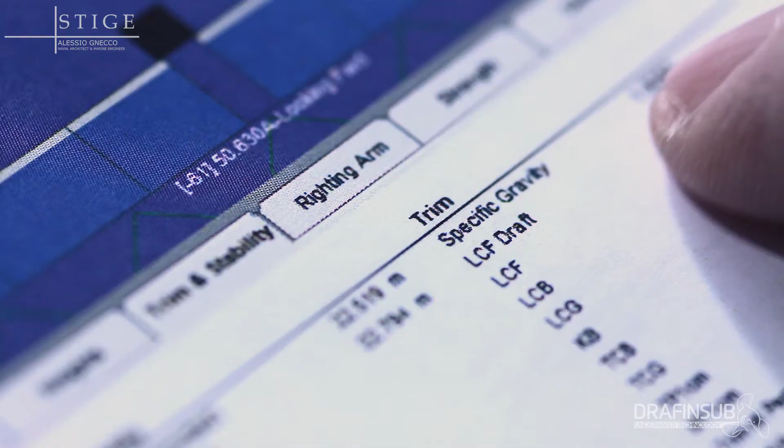I began my career in a relatively small shipyard in Italy. Most of our job was in repairs and conversions. And one of the most fascinating projects was the refitting of a cruise vessel which had sunk in the Baltic. It was salvaged and then towed to Italy to be refurbished. And it was a fascinating job. After a few months, we had the pride of redelivering the vessel in the Caribbean area. We delivered in Miami. And it was a nice moment in which we saw the new vessel sailing again for her new business.

When I was approached by the owners and managers of the disabled dock to prepare a feasibility study, I was aware of the challenges which were behind that project. The asset was an important one, and just the feasibility study showed that it was necessary to deal with different stakeholders. I knew, however, which were the tools to be used because they were not new to me. So I was conscious of the possibilities.

The incident has caused dramatic consequences to a number of persons. A major asset in an important port was out of service, and a first-class shipyard had its main launching and hauling facilities completely out of order. The various stakeholders, including the port authorities and the public prosecutor involved in the matter, were very, very careful in not allowing any type of intervention which was not carefully designed since the beginning. The key point was that nothing was to be left to chance. Everything had to be designed at a very early stage.

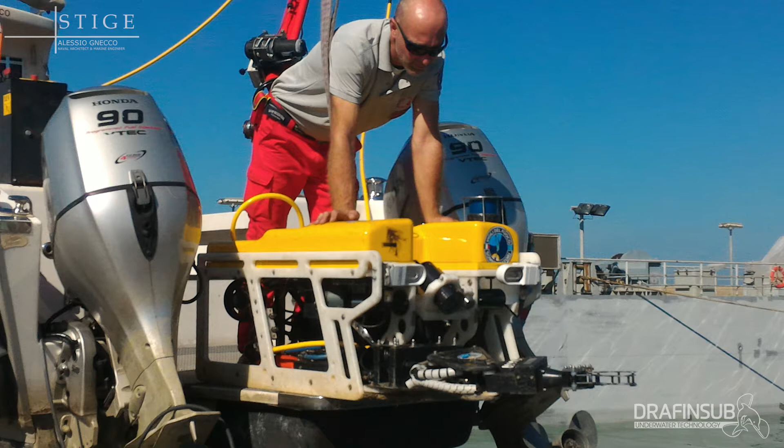The divers of the fire brigade had first surveyed the area using an ROV, but their intervention was targeted mainly to exclude the possibility of an immediate worsening of the situation. The first aim was obtaining the trust of the authorities. So I put in contact the specialist divers of the Carabinieri with the consultant to the public prosecutor. They made the first diving survey in the area. However, unfortunately, this was not fully satisfactory from a technical point of view. They did not reach the level of information that was necessary to prepare any type of design.

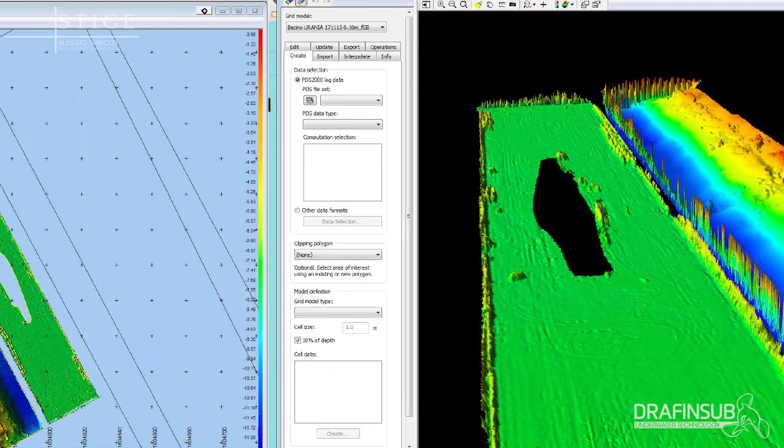A small and efficient team reached Leghorn, and the superstructure of the vessel was laser scanned, whilst at the same time, by a multi-beam, we tried to obtain a pattern of the debris under the water by using a sonar. The results were not fully satisfactory, but they gave some results which were quite important for the following project. The side scan sonar was important to try to find the position of the blocks from the original dry docking plan at that moment.

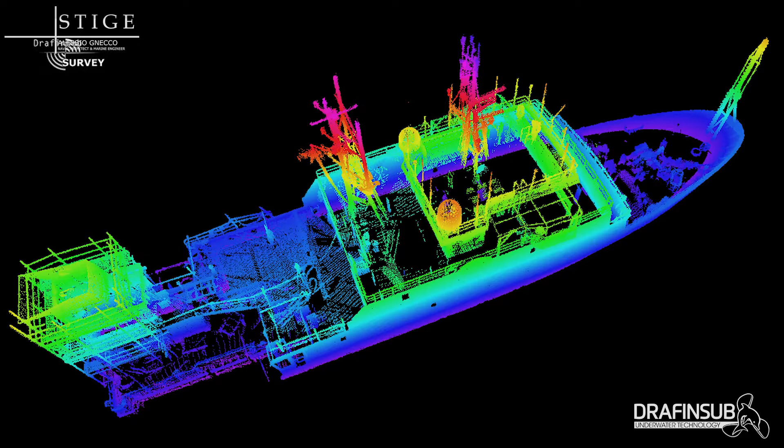It was necessary knowing where they were because it was not clear if the vessel was stable in such a position. So having repeated diving surveys with divers underneath the hull, which was not 100% stable in that position, might have been dangerous. That's why we were really in favor of remote scanning, both with laser and sonar, without involving any person directly close to the object. The extent of the damage to the dock was unknown, and no detailed assessment was possible.

I witnessed the laser scanning, and when I understood where exactly the vessel was within the dock, I presumed that some of the compartments had not been touched by the falling vessel. So I made a very rough calculation, just to understand if it was possible raising the dock without using the compartments which were likely damaged by the collision. However, these first assumptions had to be confirmed by a more scientific tool. Therefore, I contacted my colleagues of Herbert Engineering, whom I have known for some years, let me say 5-6 years, who developed a specific software tool for salvage cases such as this one.

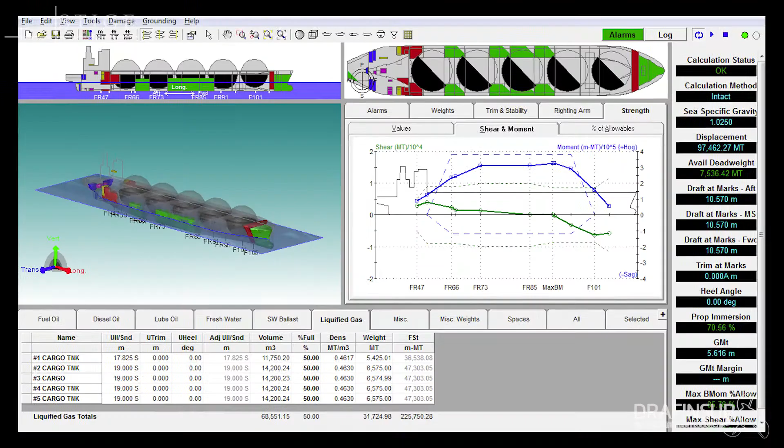Herbert Engineering is a consulting company headquartered in Alameda, with offices in Annapolis, Glasgow, Shanghai, and Singapore. One of the services provided is salvage response by using the software HECSALV, developed on purpose in-house. I had spent a few days in Glasgow together with Luca Letizia, their European manager, and I was conscious that I had the perfect tool and people to support me.

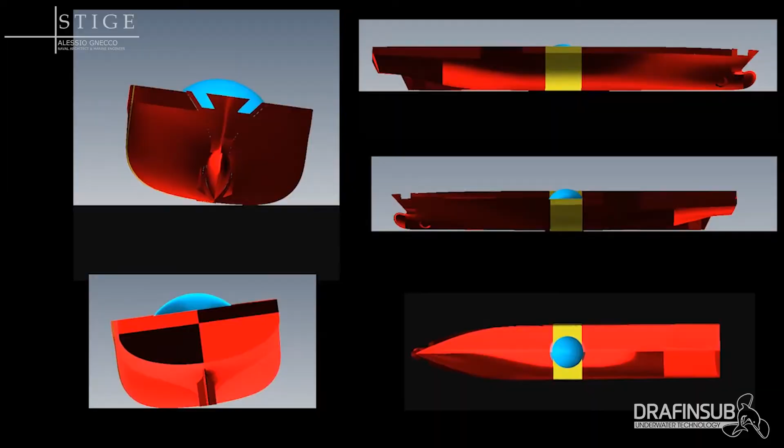Rob did some simulations, and this proved that my first assumptions were correct. It was possible raising again the dock by using only the compartments which most likely had not been touched by the falling vessel. However, the problem in this moment was that we were aware that the pump rooms were completely flooded. All the systems of the dock were out of service. So a different system has to be found to deballast the compartments.

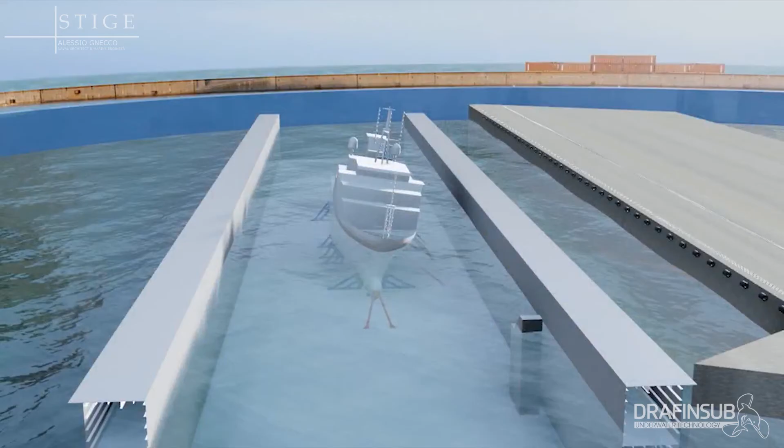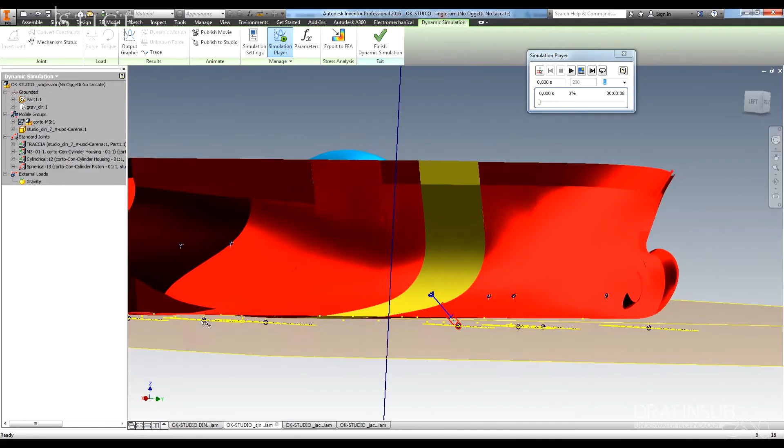I thought therefore to use some deep well pumps to be lowered into the double bottoms through openings to be created by divers on the dock floor. At this point, the progress of the project was just halfway. A further obligation was given. The vessel was to be stabilized in the dock in order to be sure that no movement was allowed during the refloating operations. Construction divers are used to utilize wedges, pillars, even sandbags, everything they can invent with their ingenuity to stabilize a floated or sunk vessel.

However, this case was pretty different because anything has to be designed, everything has to be proved and scientifically calculated. It was necessary finding a way of demonstrating to the various stakeholders that our system was reliable and safe. Apart from safety of the project, another important issue was minimizing the impact on the forthcoming investigations. It was necessary preserving as much as possible the status of the floor dock and avoiding any unnecessary removal of the object.

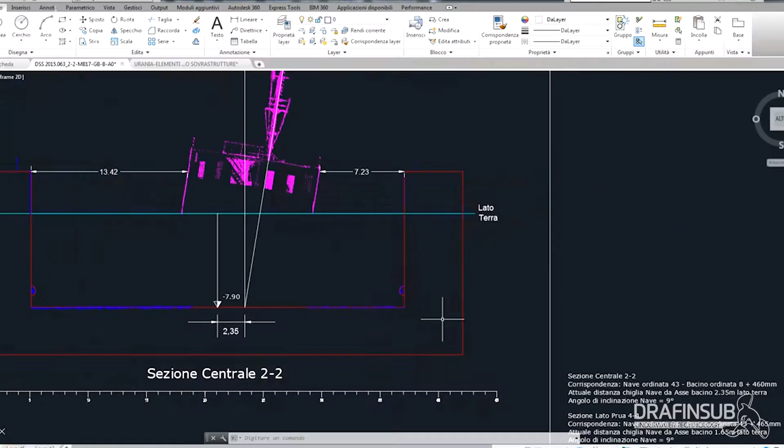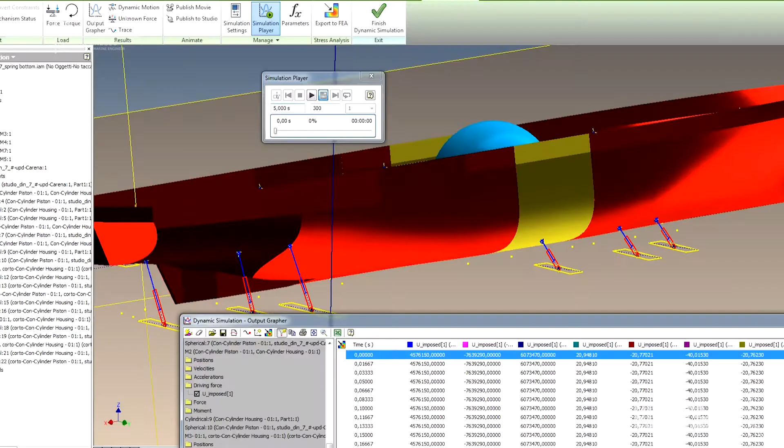We used the results of the laser scanning that we did a few weeks before, and by overlaying the cloud of points coming from the laser to the actual drawings of the vessel, we created a 3D model which was layered into the dry dock, and it was therefore possible understanding which were the interferences and the exact position of the vessel as it was in that moment. Having done some sonar surveying, we knew at a certain extent which was the position of the interfering objects. So it was possible finding some sections where placing the stabilizing devices, which were to be designed.

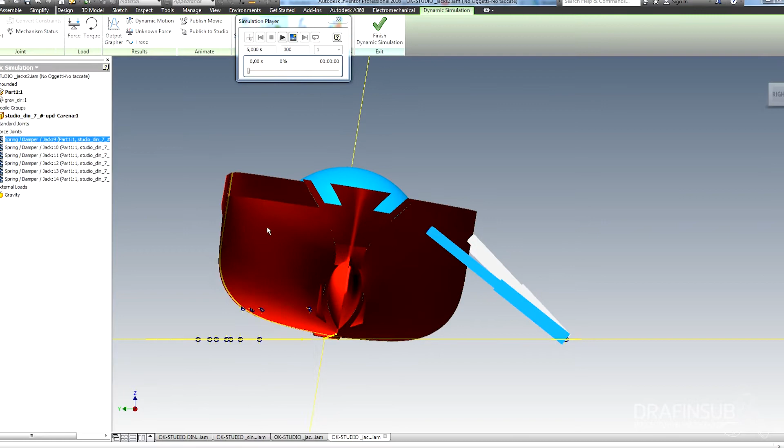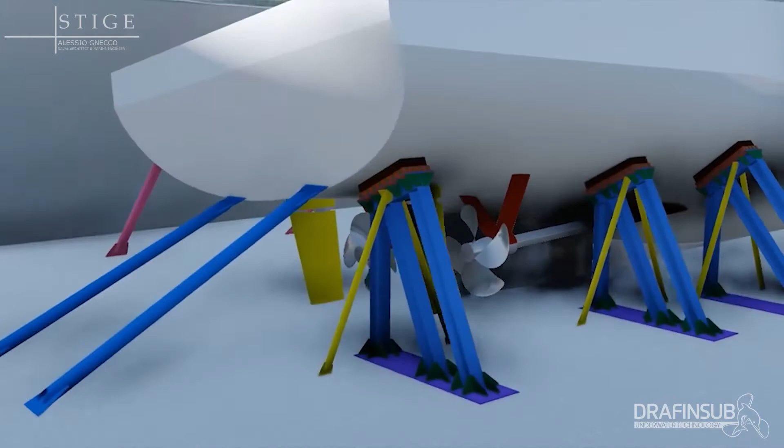These sections were very limited in number because in a few places we had the same characteristics of strength and availability of space. Dynamic simulation was run, and it was understood that it was necessary putting some stabilizing blocks on starboard side, whilst on the port side rods were necessary. The vessel had the tendency to move on her starboard side. All these stabilizing devices were designed by using FEA. There was no rule to be followed. We had to use a direct designing approach. So everything was calculated by using the software which is available at the moment.

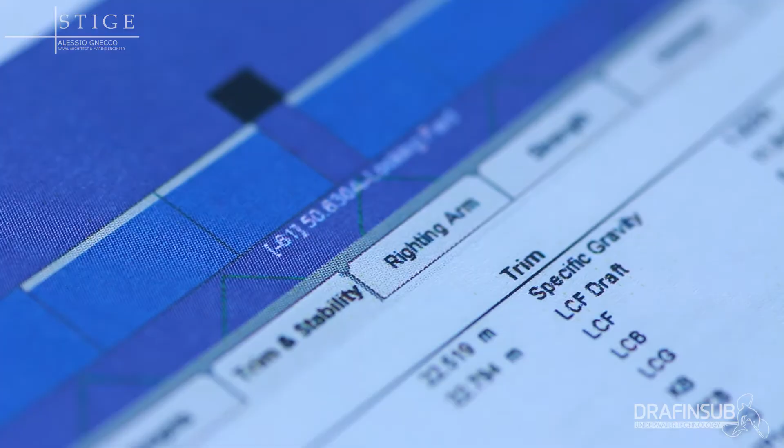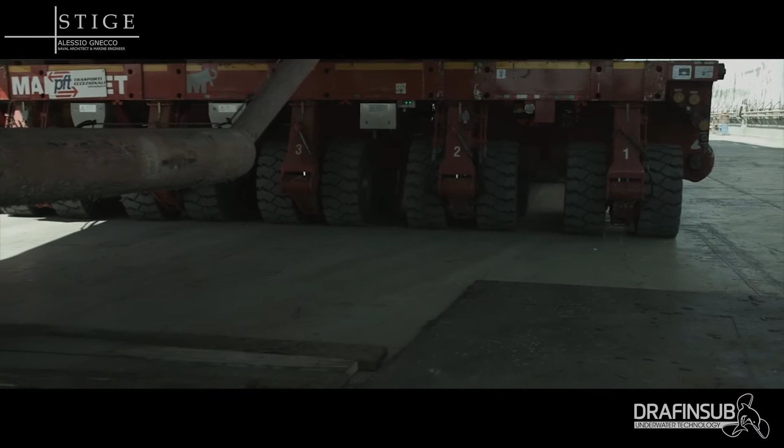June 2016. The project is complete and has been submitted to Registro Italiano Navale for cross-checking and then presented to the consultants of all the stakeholders to inform them about the decisions taken. In the matter of a few hours, all the participants are convinced and the green light is given. A temporary working site was created aside the flooded dock, including containers for offices and meeting rooms, a small workshop, and store. Wheeled cranes were moved in, services rerouted to provide compressed air, electricity, and technical gases.

Specific measures were adopted to allow the safe participation of surveyors appointed by different parties, however avoiding any possible dangerous interference with the operations. We established very, very strict safety rules, and it was our firm intention to apply them in a very strict way. Nobody has to be injured in any way during the operations, and no incident whatsoever was to be accepted.

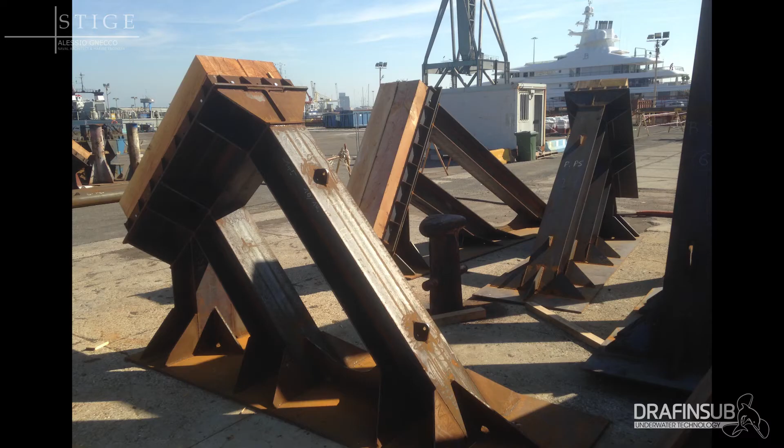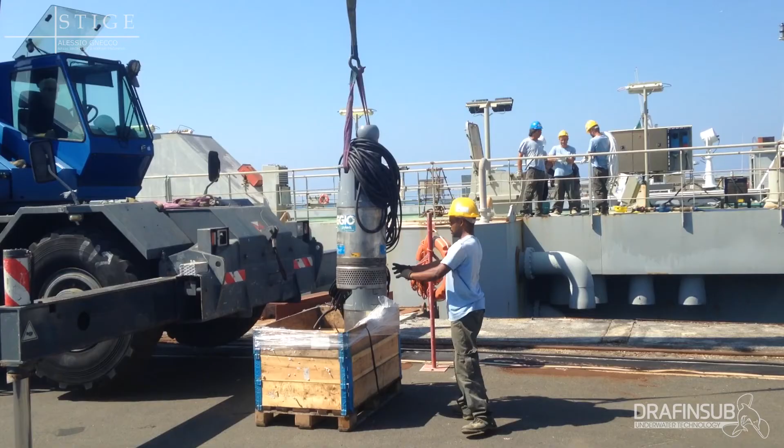In 4 weeks, about 25 tons of steel structures were cut, welded, and prefabricated, each of them in the shape and dimensions imagined on the computer monitors only. The pipes intended to accommodate the pumps into the double bottoms were delivered and the pumps provided. The participants requested to put all of the materials in the exact position were now called on the scene. The next step was to appoint Drafinsub, an underwater marine services company.

Drafinsub was started in 1976 by Adriano Passeri, my father, who is now president of the company. His first introduction to the sea was when he was in the Boy Scouts, at which time he created the sea section because there was no one else. So together with some friends who shared the same love of the sea, they started diving near Portofino, using very basic instruments to reach their goal, to go underwater. Since then, he has used his passion for the sea to create the basis of what would be his life.

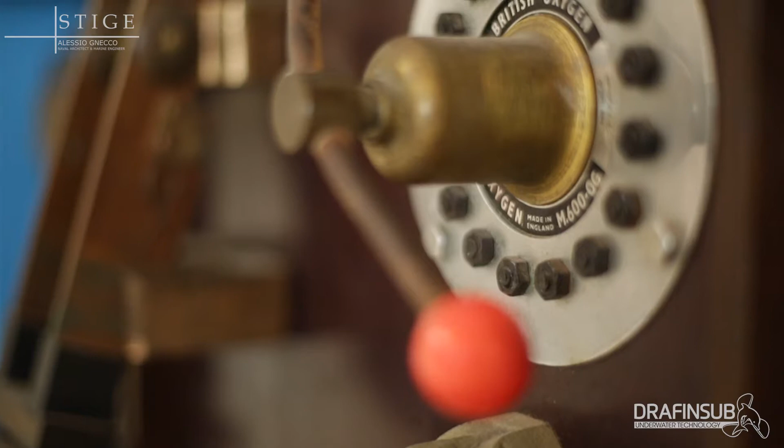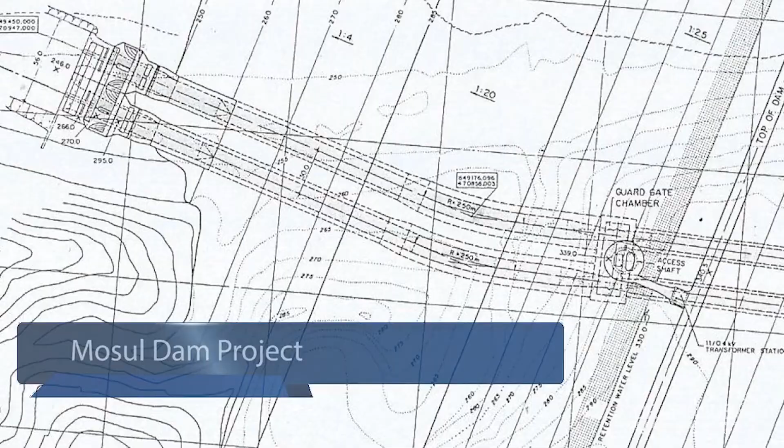The team managed to obtain post-war instruments and gear from the Marina Militare underwater department, so the first diving masks were things that my father modified and adapted for his own specific needs. I guess you could call him a pioneer, and along with my sister and brother, we followed him until today, where the company works internationally with all the necessary certifications in places such as Iraq, on the Mosul Dam.

As of 5 years ago, we began outsourcing certain aspects of the project. Before that, we were the only participants, but now we plan in advance with our own engineers, which is the best way to complete the job.

Meeting Alessio was a kind of a thunderbolt, because when two people combine their job and passion work together, there is obviously an immediate understanding. So when my father met Alessio some years ago, it started what was, and still is, a very good business relationship that makes us work again for the refloating of the Bacino Mediterraneo and the Urania boat.

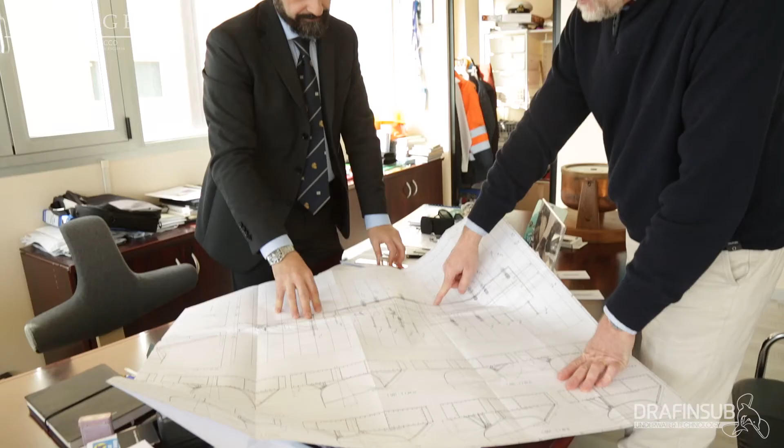Mr. Gnecco presented us with the project down to the minutest details for the operation that actually went exactly as he had projected. In my life, this had never happened before. I mean, starting a project and executing it without any changes was not something that had ever happened to me. With Alessio, however, it did.

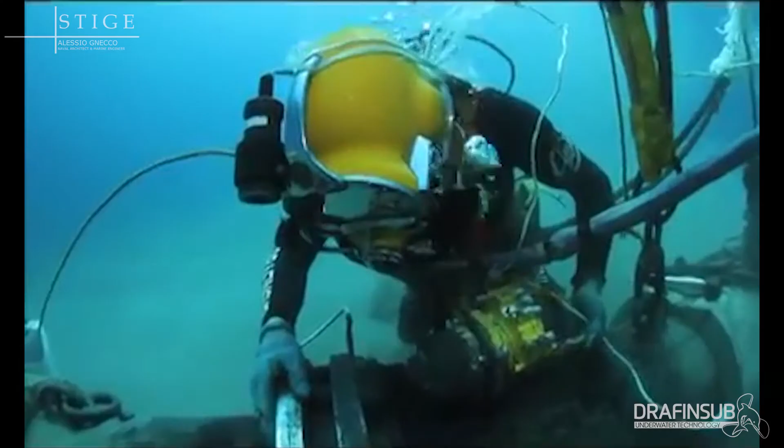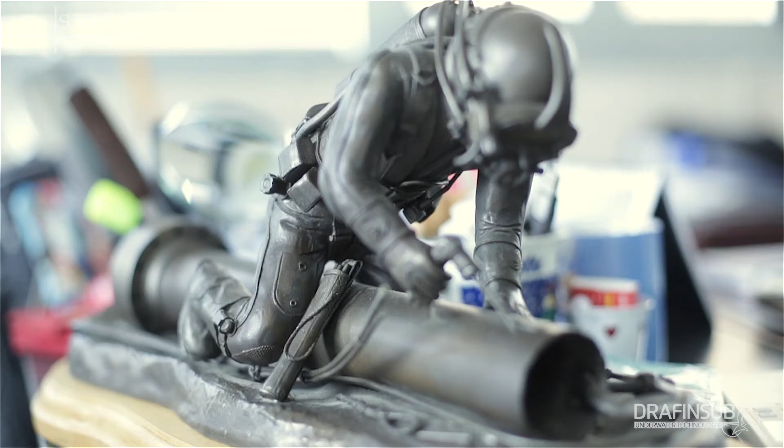We had to follow the strict rules that the judge applied. It meant not moving any object present in the area, and therefore install the saddles that Mr. Gnecco had designed. The divers were equipped with online cameras and microphones in order to receive instructions from the surface more easily. As soon as the position of the saddles was correct, the divers started to weld them to the ocean floor. This was only possible thanks to the special equipment that the divers used in order to work in dark water.

The cappuccino effect happens when the water you work in is dark due to oil, chemical materials, and the seawater from the port, which in Livorno is a mix of fresh and salt water, so the diver was not able to see his own hands. It was as if the diver were inside a cappuccino. In this case, the divers have to work from memory.

It means that you have to stop trying to see with your eyes, but start using your memory and feelings, as a blind man would do. For example, if you have to weld, you use the touch of your hands to understand where to do the job and to see if it is done well. The working time and time schedule were planned to grant efficiency and fast response without the overstress imposed by an emergency activity.

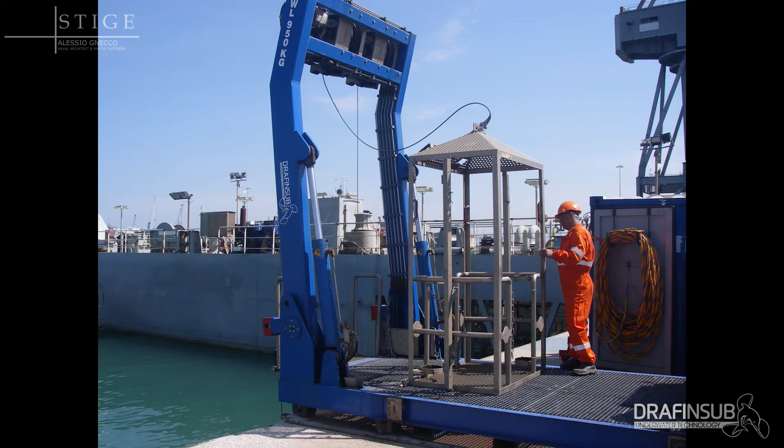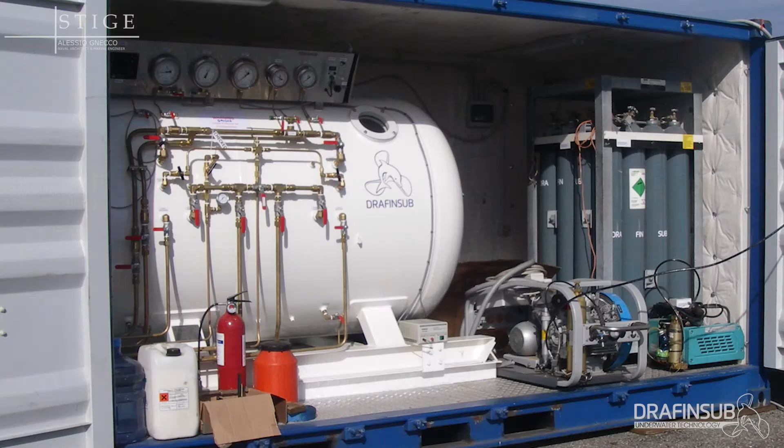As if it were a crime scene, we could not afford to make even one mistake, not even something as minor as hitting your thumb with a hammer. Everybody was expecting another accident because it was an unstable situation. The mobilization of the team of construction divers required the shifting to Leghorn of a diving support trawler, a fast RIB, and a couple of assisting boats, a dedicated recovery system to retrieve divers in case of an emergency, a hyperbaric chamber, plus all the loose gear which was considered necessary.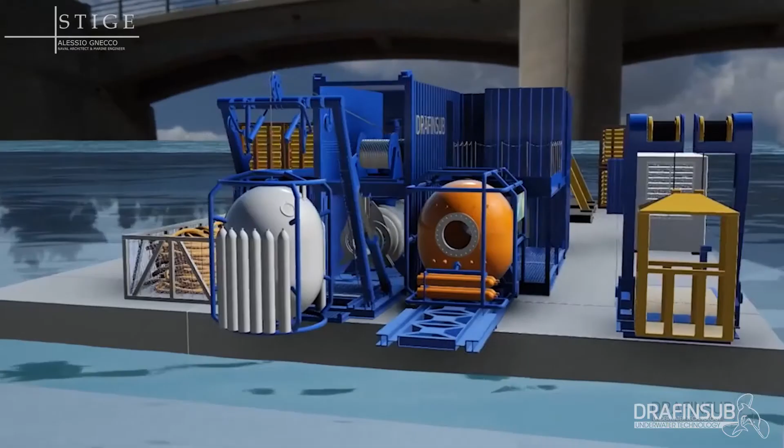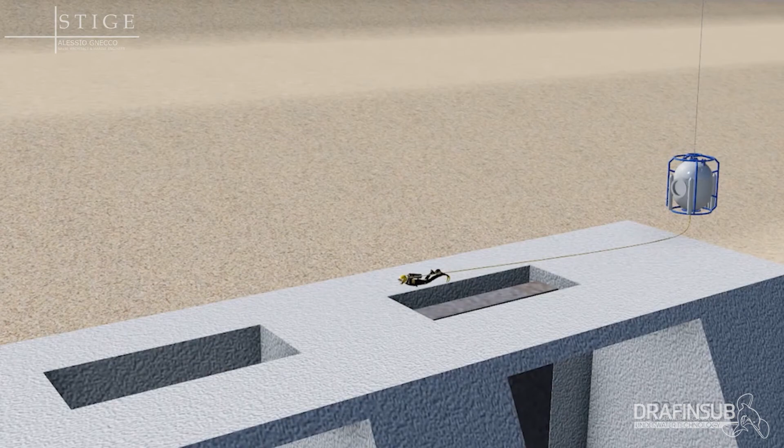We made a security plan testing the potential need to recover an injured or unconscious diver from the deep to our hyperbaric chamber or directly to the hospital. The best solution has been using the LARS, the Launch Recovery System. It is basically an elevator which is placed at the worksite from which the diver gets in and out of the water. With this method, there is no diver jumping into the water, and recovery of an unconscious diver is thereby easier and safer.

The team was made up of a superintendent, who was the one who decides how to run the daily tasks, and is the one who is in communication with the project engineer. Under the superintendent, there are 2 underwater supervisors, who are in charge of 4 divers each. It means that more than 10 people work together at the same time.

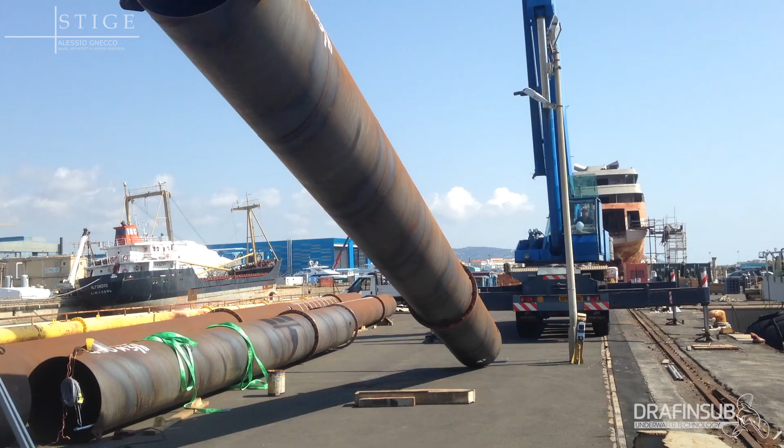Once the boat was secure and we started the refloating part of the project, welding 10 pipes with a diameter of 100 centimeters, installing the 16 water pumps that allowed us to dry and refloat the dock in complete safety. It looks like a magic trick, but it's really the result of perfect project organization. And as I said, it happened to me only once in my entire life.

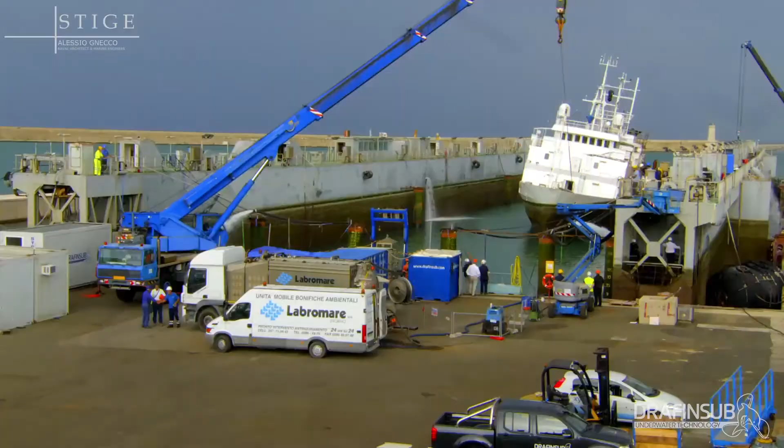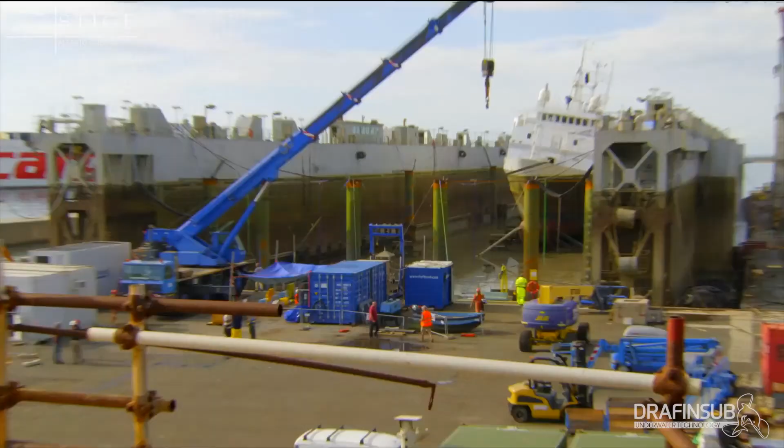At dawn on September 15, 2016, the pumps were started. The success was complete. After about 9 hours of controlled and sequenced deballasting, the floor of the dock was again above the sea surface. The project required 6 months of designing and projecting, 2 months of preparation, and then the refloating was carried out as scheduled in about 9 hours on September 15, 2016.

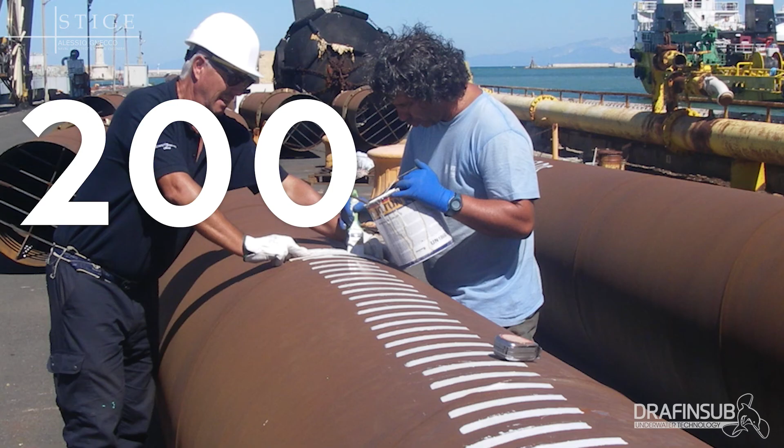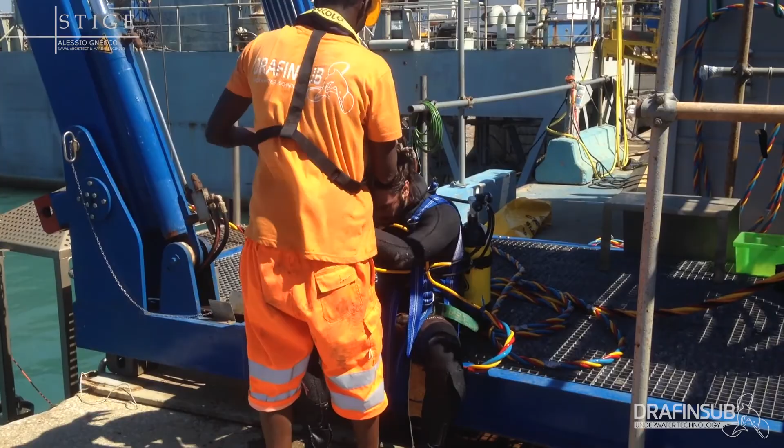About 25 tons of stabilizing devices were manufactured and put in position. Almost 200 meters of pipes having the diameter of 1 meter were inserted into the double bottoms. About 1,000 man-hours were spent diving. 16 deep well pumps having the aggregate capacity of almost 5,800 cubic meters per hour were used.

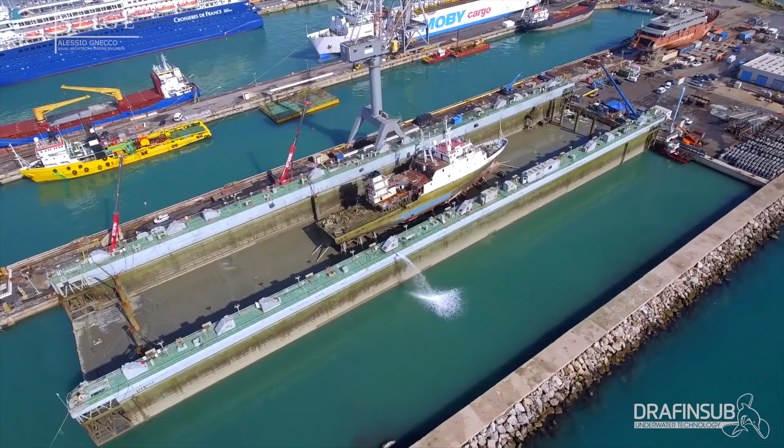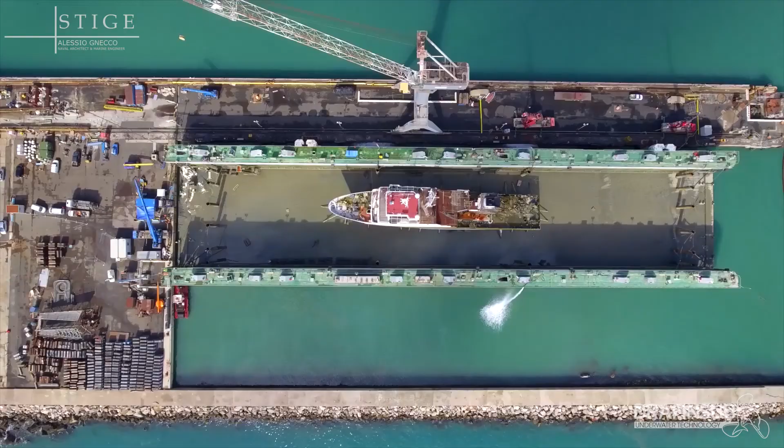Despite the impressive data, if you ask these guys which figures are in their opinion better describing the project, they say 5 and 0. 5 days of delay on a schedule of 44 planned when the project was still to be finalized. 0 accidents.